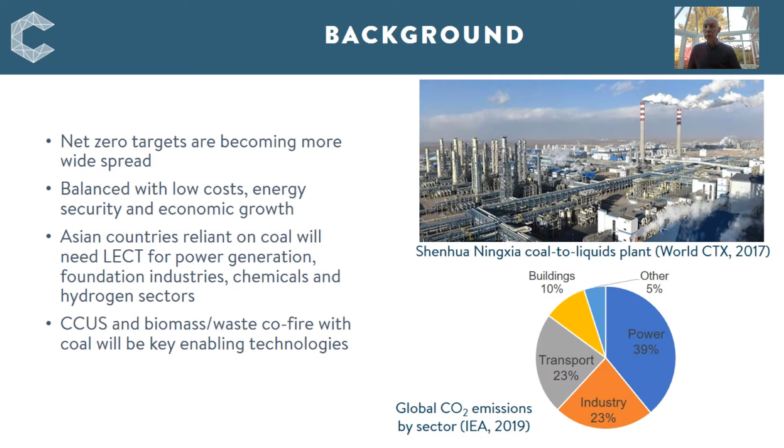The first key enabling technology is carbon capture, utilization and storage. From a technical perspective, the various elements of the CCUS technology chain are in place for commercial deployment, indicating that the barriers to widespread, large-scale deployment of CCUS are not technical. There are a total of 28 operational CCUS facilities globally at commercial scale, relating to natural gas processing, power generation and industrial applications, with the potential to store around 40 megatons of CO2 per year.

The cost of CCUS, which is probably the single most important lever for its wide-scale rollout, has reduced significantly, with the current cost of capture of around $65 per ton of CO2. Further cost reductions can be expected through learning by doing. Recent project studies predict CO2 capture costs of around $43 to $45 per ton of CO2 are achievable within a timescale of 2024 to 28.

Asia, and in particular China, should become a key focus for the rollout of commercial CCUS. The Jinjie and Ordos CCUS projects at the 0.1 to 0.2 megatons of CO2 per year scale are examples of current demonstrations in China, with future plants including the Huaneng GreenGen IGCC Phase 3 plant at the 1 to 2 megatons of CO2 per year scale, for example, planned for 2025.

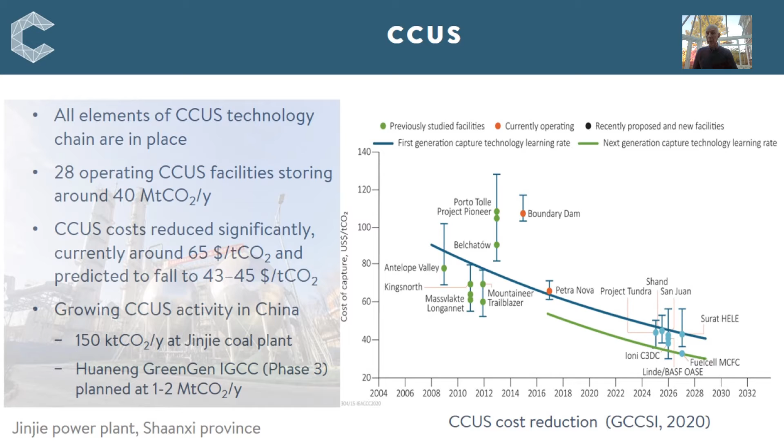Co-fire is the second enabling technology and is increasing in Asia as a means to achieve reduced greenhouse gas emissions in the short to medium term. A number of Asian countries have good agricultural forestry waste resource to further increase the potential of biomass co-fire to achieve reduced emissions. In Japan, the option to co-fire low emissions ammonia produced from fossil fuels with CCUS or from water electrolysis using electricity is being pursued as part of the country's national policies.

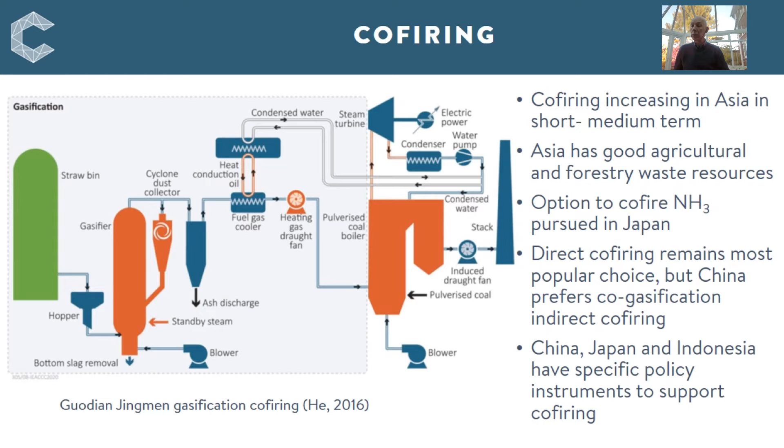As direct co-firing in pulverized coal boilers has dominated the sector for the last 20 years, this technology is more mature. It remains the most popular co-firing choice in countries such as Japan and South Korea. However, China prefers gasification indirect co-firing, where the first pilot test was carried out at Guodian Jingmen power plant with a 10.8 megawatt gasifier in 2013. Asian countries, including China, Japan, and Indonesia, have specific policy instruments in place or planned to support biomass co-firing.

Power generation is the sector with the highest proportion of greenhouse gas emissions, emitting over 8 gigatons of CO2 per year in Asia, almost half of the region's total CO2 emissions.

State-of-the-art ultra-supercritical coal power plants currently achieve up to around 47% efficiency, equivalent to around 720 grams of CO2 per kilowatt hour. As this performance limit is largely set by the steam temperatures achievable with advanced steels, efforts have centered on developing an advanced ultra-supercritical power plant based on nickel superalloys. Smaller increases in steam temperature using new steels, together with advanced steam cycle conditions, have the potential to raise efficiencies to approach 50%, or around 680 grams of CO2 per kilowatt hour in the nearer term.

Several alternative high-efficiency pathways are based on gasified coal, and the integration of fuel cell technology offers the potential to further increase the efficiency of low-emissions coal technology. In the long term, efficiencies of around 60% lower heating value basis have been projected for such power plant at the multi-100 megawatt size range.

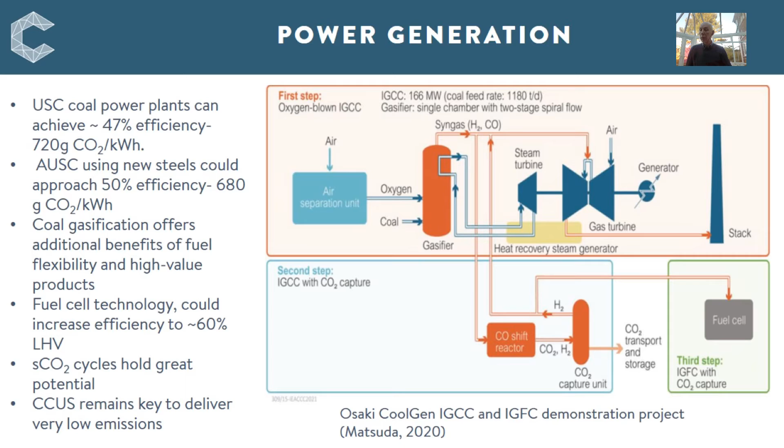Coal power plant offers the best option to provide system flexibility in the near term to support the increasing levels of variable renewable energy in the Asian case study countries. For the most modern ultra-supercritical power plant with high turn-down capability, the opportunity should be taken to retrofit CCUS technology so that the dispatchable power provided can do so with very low carbon emissions.

Dispatchable coal-fired power generation provides high levels of inertia, which plays an important role in the overall power grid system response, including frequency disruptions and power factor corrections. Even when high levels, in excess of 50 to 70% variable renewable energy, are achieved in the future, coal-powered generation technology will remain key to ensure security of supply. Consequently, an increase in variable renewable generation capacity does not necessarily allow for significant closures of dispatchable plants.

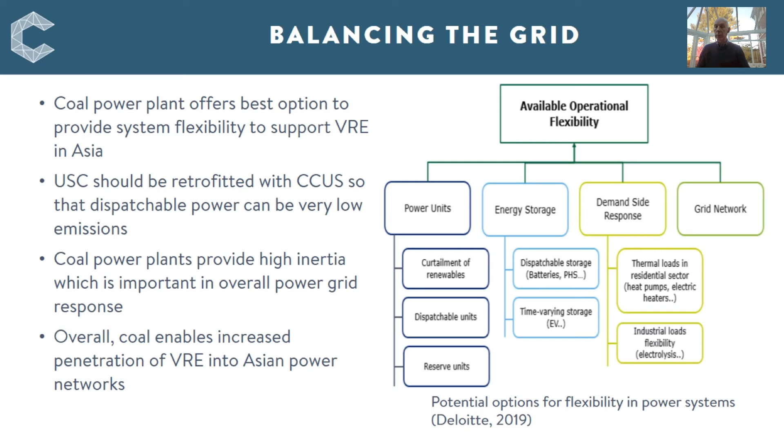Industry produces about 8 gigatons of CO2 per year of direct emissions, with the cement, iron and steel and chemical sectors being responsible for around 70% of these. Demand for industrial products is forecast to grow at least through to 2050, driven by population growth of 2 billion people and growing affluence.

Almost 2 gigatons per year of the CO2 industrial emissions are byproducts of chemical reactions within the production process itself. These process-related emissions cannot be avoided using feasible production technologies. For example, 60 to 65% of emissions from cement production are created when the calcium carbonate is converted to calcium oxide, with these CO2 emissions produced as an inherent part of the cement manufacture process.

China dominates the global production of cement, steel and aluminium, making 50 to 60% of the global quantities, and is a major producer of chemicals, which is set to grow in the coming decades. A portfolio of approaches is likely to be necessary to reduce CO2 emissions, including fuel switching to hydrogen, biomass, and electricity via electrification, where these are available at competitive prices; improved energy efficiency, although this will not achieve net zero emissions by itself; and the deployment of current best available and future innovations, including CCUS.

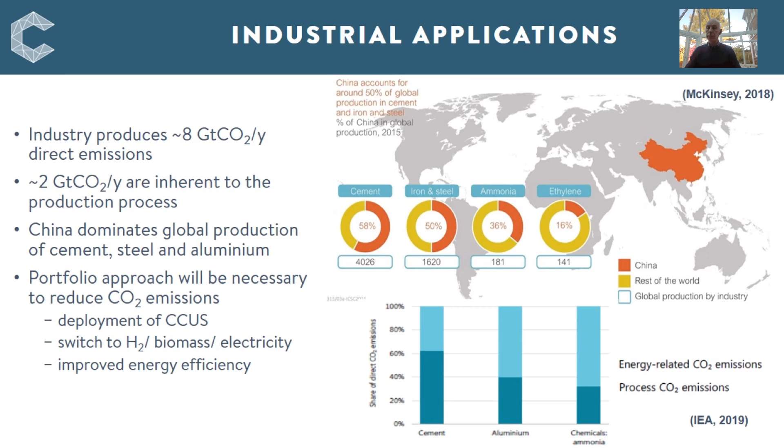To summarise the position of industrial applications, coal as feedstock and for process heat dominates in China, accounting for 70% of its steel, 83% of cement, and 75% of aluminium production. As noted already, there are opportunities for fuel switch to use biomass and hydrogen, potentially co-firing with coal, and some opportunities for electrification, particularly to increase the use of scrap steel and aluminium. But given the clear dominance of coal in China, coal will continue to be key through the transition, with CCUS retrofit essential as one of the key technologies to decarbonise the industrial sector.

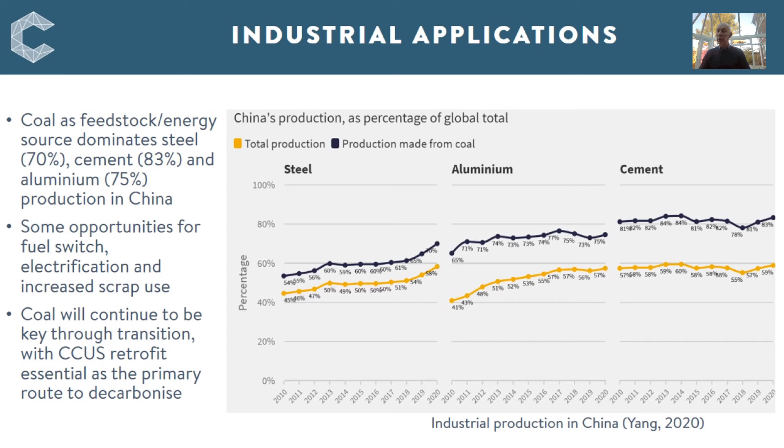In terms of chemicals and fuels production from coal, gasification can offer the best production route in the Asian context. Gasification has a strong track record in China, which is to some extent due to the use of coal as a strategic measure to avoid dependence on imported feedstocks and due to the relatively high natural gas prices in China.

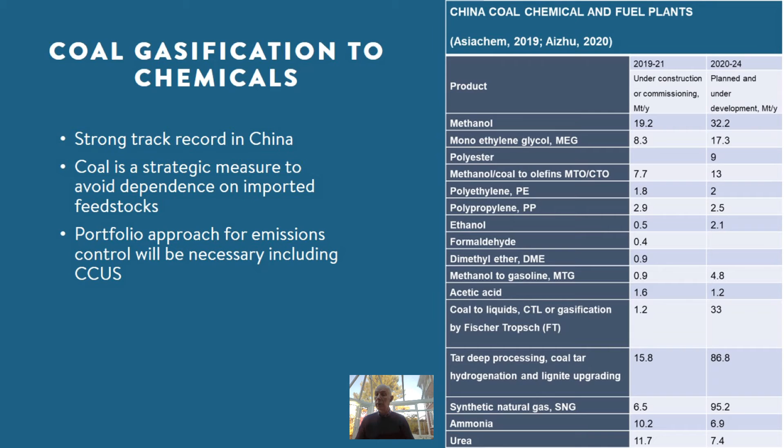The chemicals and fuel sectors are growing and are forecast to continue to grow through the transition, particularly methanol as an intermediate, synthetic natural gas, coal to liquids, and tar deep processing and hydrogenation, together with lignite upgrading. There is some opportunity for process optimization to improve conversion efficiencies, but again, it is the use of CCUS which must be adopted to allow this industry to develop in a way consistent with net zero emissions.

Hydrogen is the final sector assessed in this study and is the most versatile in that it can play into all sectors. The breakdown of the forecast use of hydrogen demand in 2050 is shown here, with a total demand of up to 78 exajoules or 650 megatons of hydrogen per year possible.

This hydrogen would be used primarily for industrial feedstock and energy, together with transportation, heating and powering buildings, and power generation including hydrogen buffering. The spread of hydrogen usage across these sectors is relatively uniform, with significant quantities of hydrogen used in each. In terms of hydrogen production, the preferred method depends on local factors.

In China, low emissions hydrogen production via gasification with CCUS is lower cost than low emissions hydrogen based on water electrolysis, typically by a factor of approaching 3. Given the economic advantage of coal gasification with CCUS, it is likely that this will continue to be a low-cost source of large-scale hydrogen in the near and medium term in Asia.

Looking at the impact of the different hydrogen production methods, when CCUS is added to coal gasification, the carbon intensity can be reduced to below 3 kilograms of CO2 per kilogram of hydrogen based on 90% CO2 capture. Co-firing biomass with coal, increasing the capture rate to closer to 100%, or using advanced technologies such as the Allam cycle, could all reduce the CO2 emissions closer to net zero, or even below in the case of biomass co-firing with CCUS.

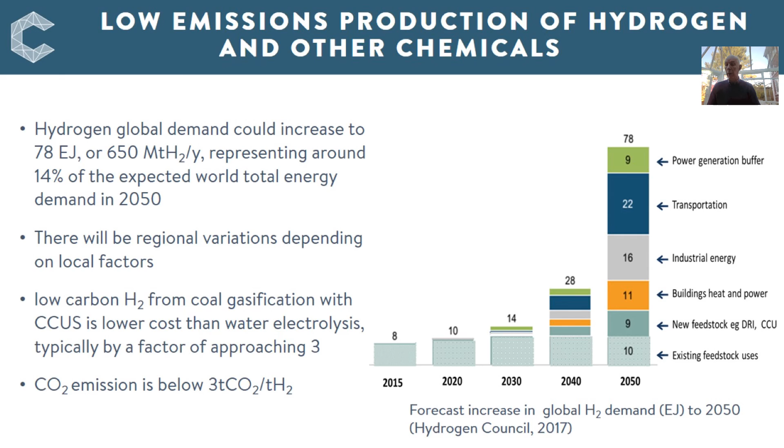Having looked at the technologies, I will now look at the challenge in Asia. The Asian population is growing and will continue to increase through the transition, peaking at around 5.3 billion people in 2050 to 2060. This will be an increasingly urban population, with the fastest growing cities in the next 5 years almost all in Asia and Africa. This population growth will be matched by a growth in GDP.

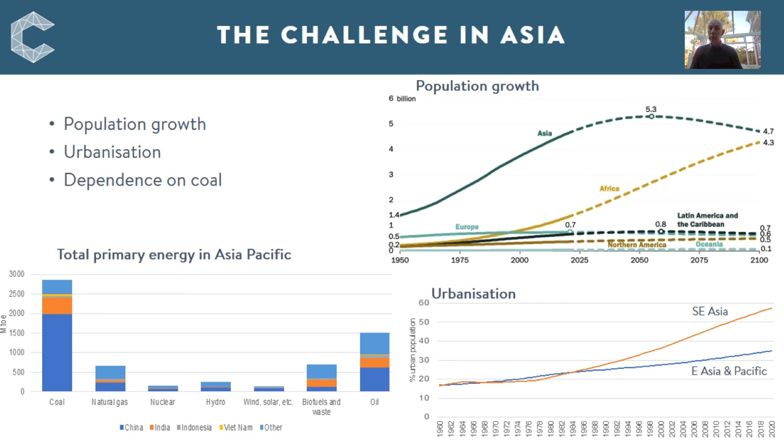Asia has already grown from 13% of world GDP in 1960 to 33% in 2020. Indeed, China, India, Indonesia and Vietnam are set to leapfrog the richer nations in terms of GDP over the transition period to 2050. As a consequence, Asia now accounts for more than half of global CO2 emissions, accounting for around 17 gigatons of CO2 per year in 2018.

China dominates this, with its tons of CO2 per capita now well in excess of the global average. It seems clear that Asia, and particularly China, are fundamental to the overall global challenge of achieving net zero emissions by 2050 to 2060. So to summarise, a number of Asian countries have now committed to net zero emissions by 2050 to 2060, including China and Japan.

Increasing levels of renewable energy will be pursued, but due to the region's dependence on coal for power generation, for industrial manufacture, and to produce hydrogen and ammonia, coal will continue to be used for the next 20 years. This is in part due to the need to ensure security of energy supply and to provide dispatchable power to help provide a stable power grid as the level of variable renewable energy increases. This must be set against the backdrop of achieving the lowest cost solution to net zero emissions as the region grows in terms of population, urbanisation, and increasing economic wealth.

In order to do this in a way consistent with achieving net zero emissions, technology will be crucial. There will be opportunities to co-fire coal with the region's significant agricultural and forestry wastes, and to co-fire with low emissions hydrogen and ammonia to reduce emissions. But to achieve net zero emissions, particularly in the hard-to-abate industrial processes such as cement, steel, aluminium, and chemicals, carbon capture, utilization, and storage will be a key technology.